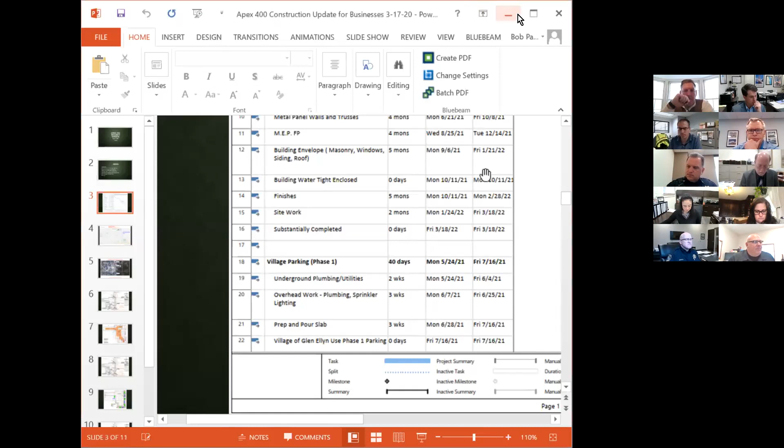You're on mute, Bob. Bob, you're on. Can you hear me? If you'd like, I could share the screen, take it over, and use the mouse to talk people through it. That will be fine. Let me allow you to do that. Keith, you want me to do that too with the mouse? Absolutely, you can do that and follow me. Okay, Bob, go ahead. Where is it? Can everyone see the screen?

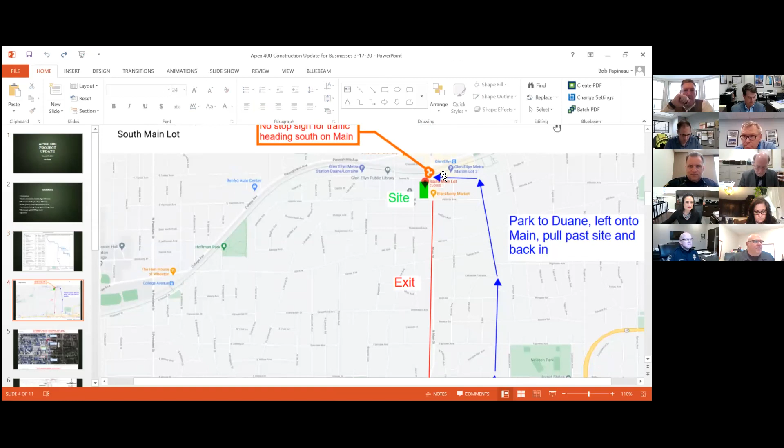Yes, okay great. Okay, so the schedule, I'll zoom out. Okay, so I'm going to talk about the schedule. Let me pan over a little bit.

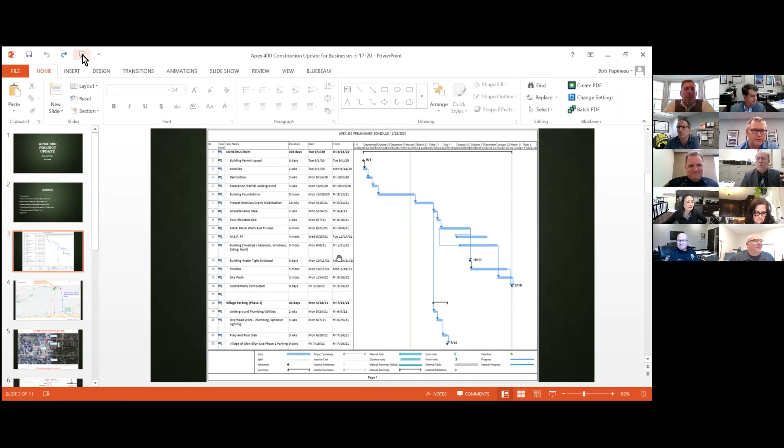Hey Bob, because we're going to be looking at some maps with small details, can you go to the little icon at the very top of the screen, it looks like a little screen with an arrow in it, towards the left. Click on that, it'll start an actual slideshow so the slide becomes full screen. Next to the right arrow at the top, next to the blue arrow top left. Up further, up further, okay, to the right. Yep, that one, okay, and then just, yep, there you go.

All right, so as far as the construction schedule, we're at a big milestone. Item 6 here, foundations are pretty much substantially completed, and we're building the haul road in preparation for the precast erection, which is line item 7 here. That's cranes coming this week, and we're starting the erection on Monday, weather permitting, and that duration is roughly 10 weeks.

We all know construction and weather happen, but our goal is to be done with the precast May 21st. Before we can go vertical with the building, which Keith will touch on with the plans, we've got to do some miscellaneous steel and pour an elevated slab. That whole sequence will probably take a month. So June 18th is our target date, where we'll be done and ready to start the metal panels and trusses.

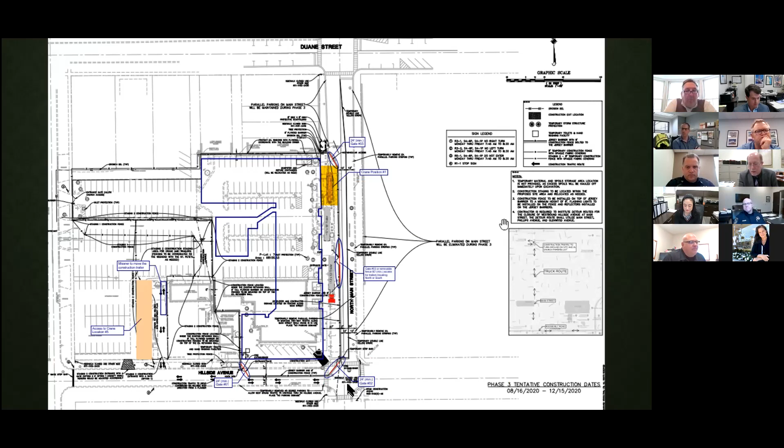If we can go one more slide, please. This one? When we get to the closure. So when the crane for the wall panels and the precast gets to the south end of the building, in order to reach far enough into the building, the cranes are going to be set up on Hillside. So for those roughly two-week periods, a couple times during construction, Hillside will be closed to through traffic for the width of the property.

But again, from the west line of the construction site to Glenwood, it will be open so that businesses and the church can get to their properties. Then as fast as they can get the crane to the next position, number 5, they will pull the barriers and construction fence back to where they are now and reopen Hillside.

So the project fence line is going to morph through the duration of this project, but we have looked at this many different ways and feel that this is the most time efficient and safe way to control construction traffic, yet actually get the building built.

Any questions on that?

The other thing to look at too is, I understand we're looking at, did we say, Stacy, mid-April, that the Civic Center parking garage is likely to open? Am I correct on that? Possibly, but no later than May 1st. Could be as early as mid-April.

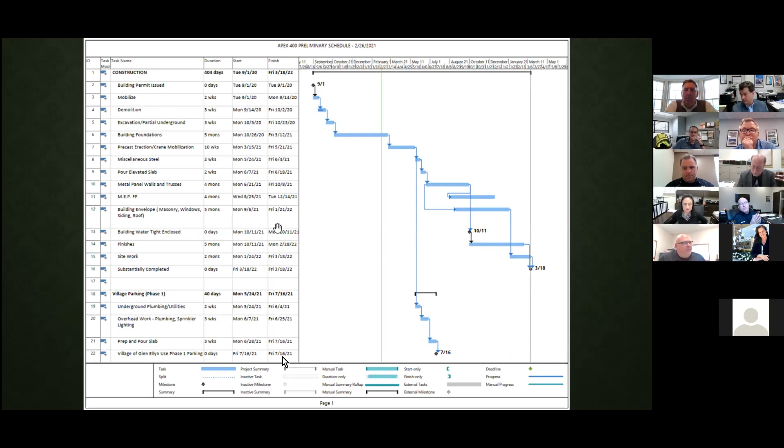Okay, and may I interrupt? Because I just want to make sure we're all clear on something. It may be done by middle of July, but there won't be any pedestrian access to Main Street till when?

When that garage is open, we will have access in this corner right where the arrow is. The canopy erected in front of Santa Fe is part of a covered walkway that's going to be created from the garage entry right in that location, to allow people to skirt outside the building through that walkway and get on the west side of Main Street in front of Santa Fe. So there will be a covered walkway to allow people to safely go through there once the garage is open.

That is a piece of the criteria for getting this open. Keith, is that what we talked about a week ago though? Because I thought I heard something different.

No, that's what we talked about, but it won't be any vehicle traffic coming out of there. Just the pedestrian traffic is fine. I didn't think we could let pedestrians out onto Main Street. We just have to make sure we're done with all of our brickwork, everything above it. I know we have a covered area, but we need our brickwork and stuff done, which we anticipate being done in that area first. And that's our goal, by mid-July, basically by the end of July.

We have to put in a temporary fire system. There's a lot of stuff that has to happen. We've got to pour a slab in there, but unless something major happens, I think Bob's timeline is pretty good.

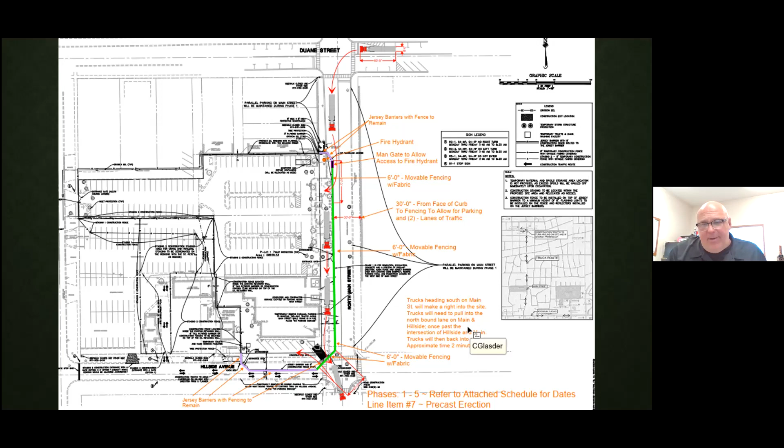One thing I forgot to add is we're going to have flaggers all the way - one at Park Avenue and Main, and 38, every intersection that we've got, and a few of them on Duane and Main. So we'll get through this without any hiccups. We have contingency plans for anything that should happen. We're dealing with a good professional here who does this every day, so we have all confidence in that subcontractor.

Are there any other questions on any of that?

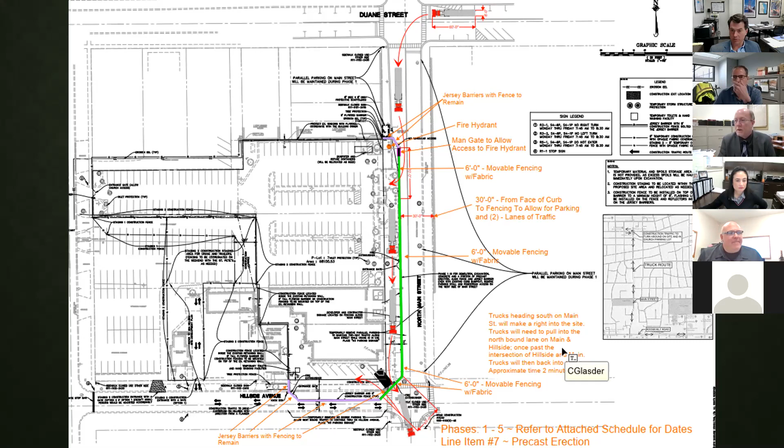All right Steve, want to go back to the agenda, or what else do we want to cover here? I think we've hit all items on that agenda, but if we flip back real quick, we basically covered the information we were planning to share. But again, we're still willing, if there are other questions, for somebody to raise them now, or get back to either Bob, Keith, or myself individually. We'd be glad to get back to them individually or as part of the group.

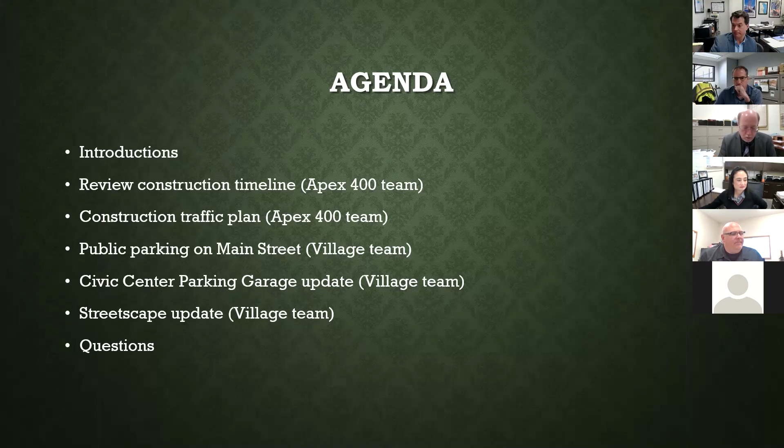So we welcome open communication on the project, and hope to be able to, as Rich was indicating, utilize social media to give advance notices as best we can on the duration of the project.

Steve, I have a question. This is Scott Schaub. I just want to be clear that Keith Harrell will be sending out communication in advance of the closing that'll affect Hillside between Main Street and the west end of the Apex project. During those periods, we'll obviously be impacted. There will never be a time where I won't be able to enter my building, or my employees can't enter, even though it may be a little roundabout through Glenwood to Hillside the wrong way, through a barrier that says through traffic only. There won't ever be a time within those periods that the slabs are delivered that we won't have access to our building. Is that correct?

That is correct, with the only caveat being there might be 5 or 10 minutes of closure at the intersection of Hillside and Main, even with Hillside open, as trucks try to back into the building. That will occur several times during the day, but beyond that, when Hillside is closed on the south side of the project, you will have full access at all times in and out of your property. The full frontage of your property and the property to the east will be open for access. Does that answer your question, sir? It does. Thank you.

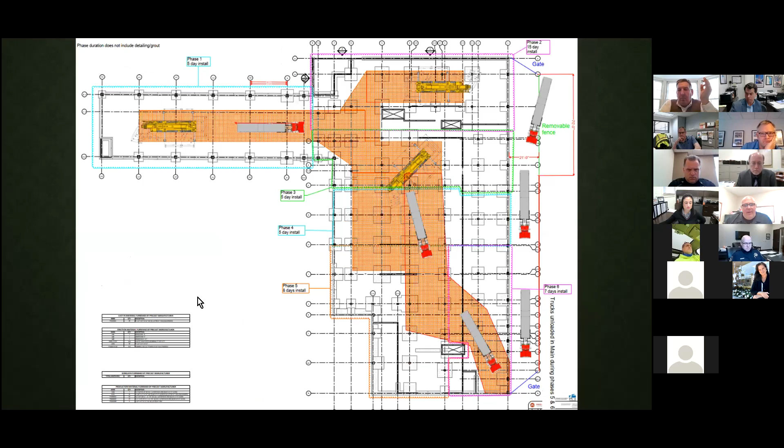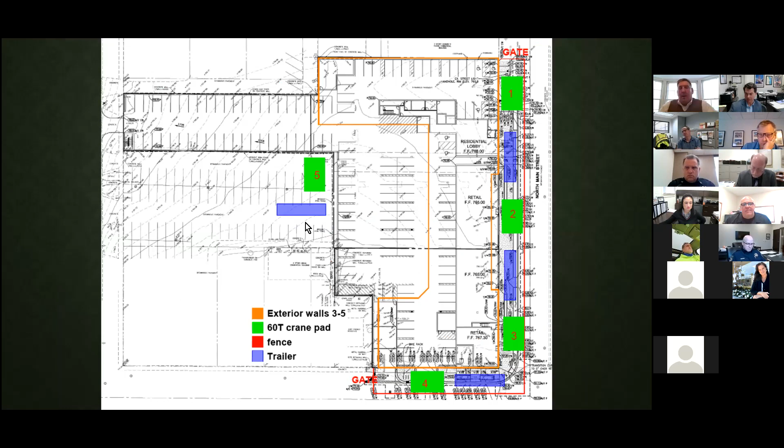But Keith, you're working in that area, correct? Are you going to be completely closing that off? Phase 5, yes, it's a temporary barrier though. If he needs a garbage truck, we can get a garbage truck in there. Yeah, let's make sure we accommodate that. It's not a problem, Scott. What's your pickup day, if you don't mind sharing? Jason. Tuesdays. So Keith, if you can make note of that. And then just notifying - I should know this, but if it's for public services or Groot regarding the Hillside closure, I have contacts. They'll just need to know they can access off of Glenwood for the property to the east.

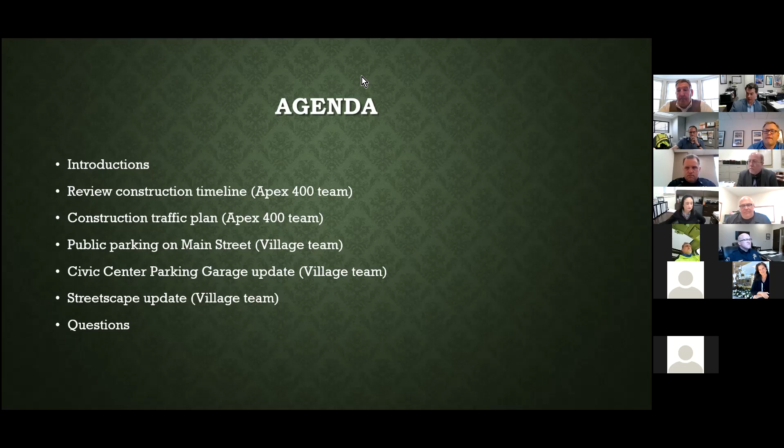All right, I guess last thing too, Keith, do you want to just provide your contact information one more time? Is that on the screen? I missed it. It's on the last slide. There you go. So anyone interested in reaching out with day-to-day questions or anything else, I know Bob and Keith are both open to that. It's also on a big old sign at the corner gate. True, that is also true.

Steve's got my email in case you want to do it that way. Again, if you can't get through to either of the two of them, which I highly doubt would be the case, you can always contact me with any questions you may have, or feel free to copy me on anything you forward to them as well, whatever's your pleasure. We just want to make sure we're responsive to things as they come up, and we will do our best to do that.